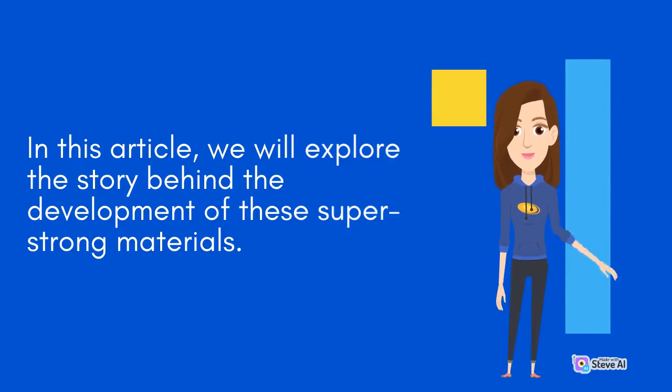The story of invention technology to produce super strong materials with high mechanical strength. The discovery of high-strength materials with exceptional mechanical properties has been a game-changer in many industries. In this article, we will explore the story behind the development of these super-strong materials.

The history of high-strength materials dates back to the early 20th century, when researchers began to explore the properties of new materials such as alloys and composites. However, it wasn't until the 1970s and 80s that significant advances were made in the development of high-strength materials with exceptional mechanical properties.

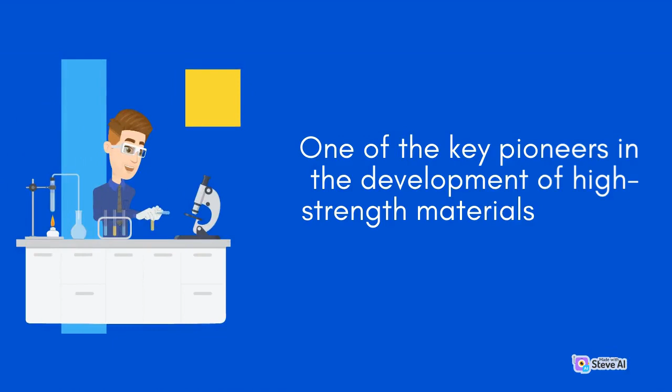One of the key pioneers in the development of high-strength materials was John W. Cahn, who helped to develop a new class of materials known as bulk metallic glasses, BMGs. BMGs are a type of metal alloy that has an amorphous, glass-like structure rather than the crystalline structure of conventional metals.

BMGs have several advantages over conventional metals, including exceptional strength, high elasticity, and good corrosion resistance. They can also be molded into complex shapes using processes such as injection molding, which makes them ideal for use in a wide range of applications.

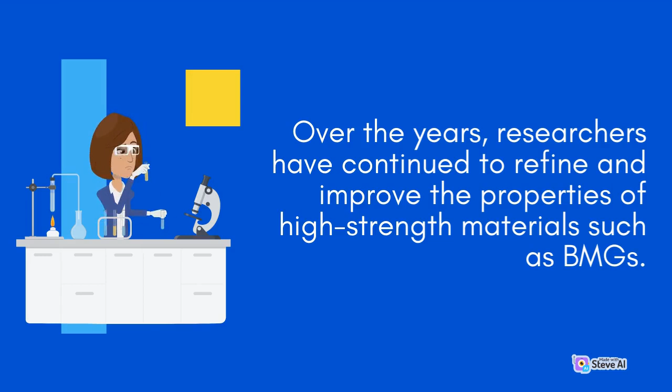Over the years, researchers have continued to refine and improve the properties of high-strength materials such as BMGs. Today, there are several different types of high-strength materials, including carbon fiber composites, ceramic composites, and nanocrystalline metals.

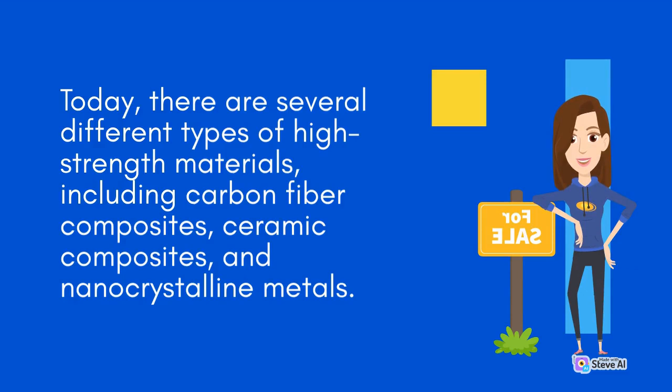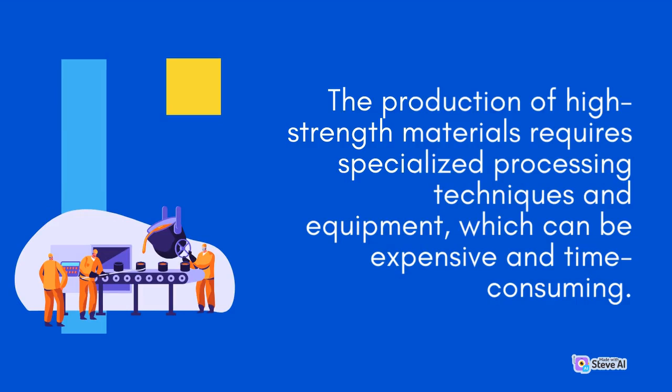One of the key challenges associated with the development of high-strength materials is ensuring their manufacturing and production. The production of high-strength materials requires specialized processing techniques and equipment, which can be expensive and time-consuming. However, advances in manufacturing technology have helped to reduce these costs and make high-strength materials more widely available.

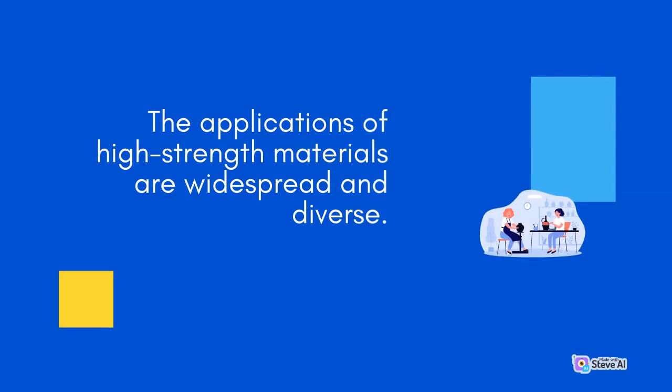The applications of high-strength materials are widespread and diverse. They are used in the aerospace industry to make lightweight, high-performance components, as well as in the automotive industry to make stronger and more efficient vehicles. High-strength materials are also used in medical devices, sports equipment, and even in construction materials such as concrete and steel.

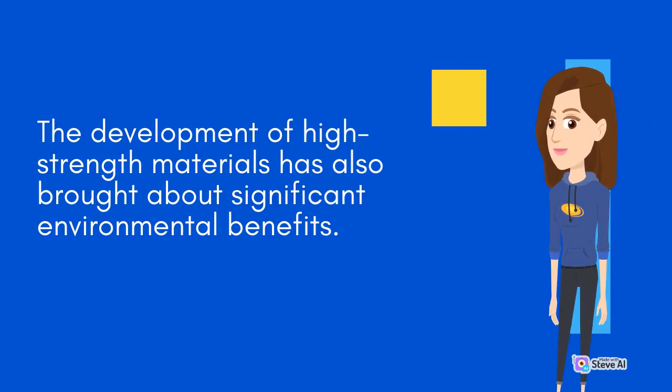The development of high-strength materials has also brought about significant environmental benefits. High-strength materials are often lighter and more durable than conventional materials, which can help to reduce the environmental impact of manufacturing and transportation.

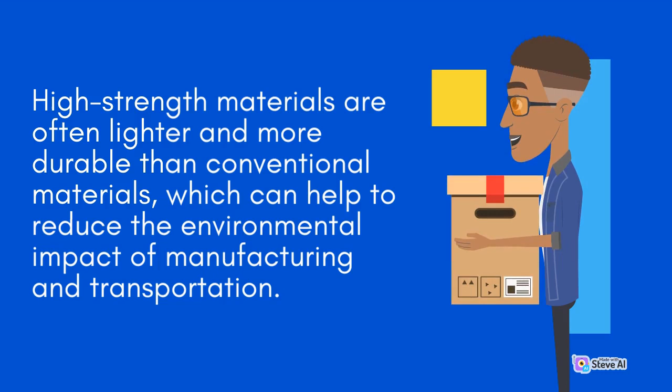For example, the use of high-strength materials in the automotive industry has led to the development of lighter and more fuel-efficient vehicles, which can help to reduce greenhouse gas emissions and improve air quality.

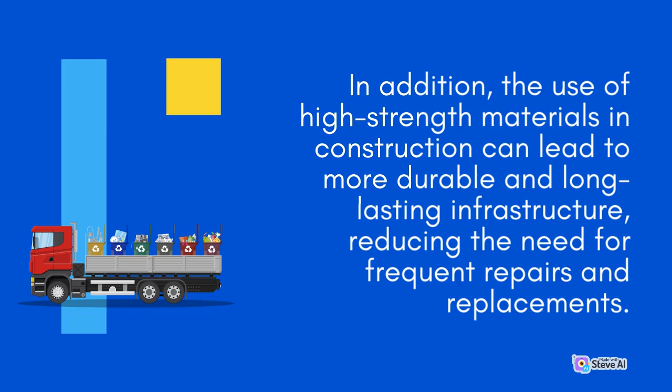In addition, the use of high-strength materials in construction can lead to more durable and long-lasting infrastructure, reducing the need for frequent repairs and replacements. This can help to reduce waste and conserve resources over the long term.

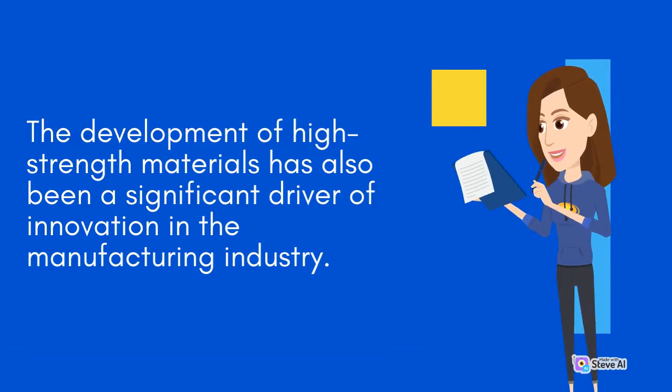The development of high-strength materials has also been a significant driver of innovation in the manufacturing industry. The production of high-strength materials requires advanced processing techniques and equipment, which has led to the development of new manufacturing technologies and processes.

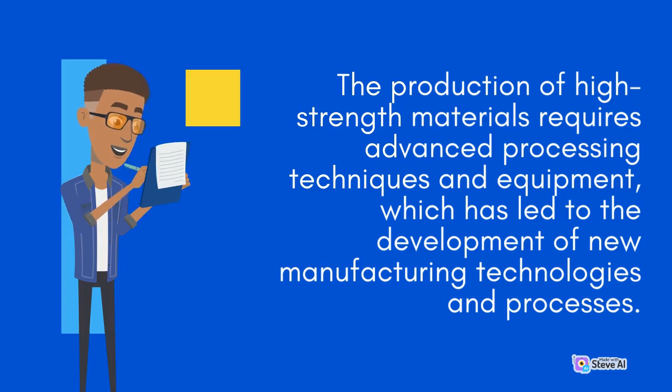These advances have helped to improve the efficiency and productivity of manufacturing, leading to cost savings and increased competitiveness for companies that adopt these technologies.

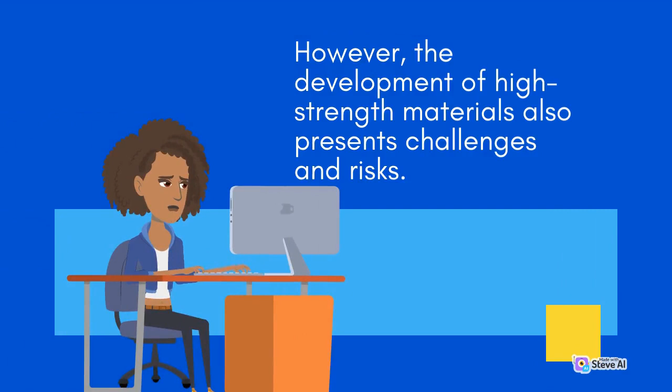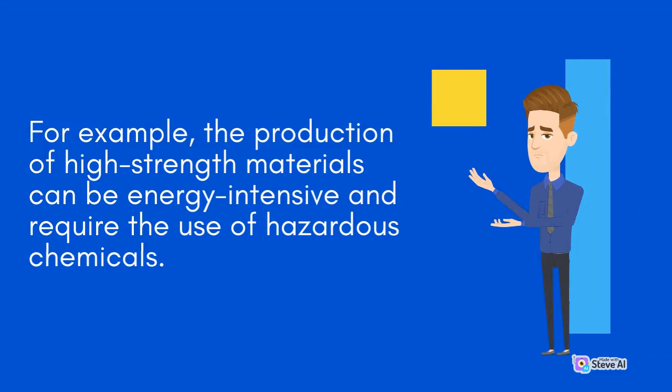However, the development of high-strength materials also presents challenges and risks. For example, the production of high-strength materials can be energy-intensive and require the use of hazardous chemicals. It is important for manufacturers to adopt responsible and sustainable production practices to minimize these risks and ensure the safe and environmentally responsible use of these materials.

The development of high-strength materials has also opened up new possibilities for the design and engineering of complex structures and systems.